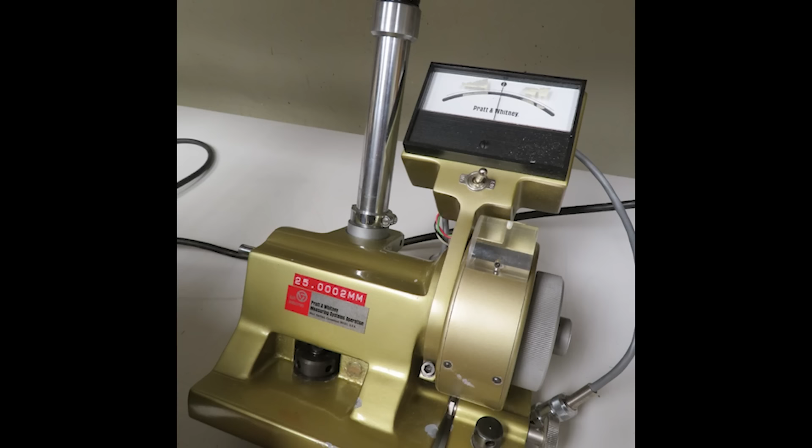British trade journals called American precision crude approximation masquerading as science. German engineers shook their heads at American mass production dreams. The French inventors of the metric system dismissed American measurements entirely. Then two men walked into the Pratt & Whitney workshop with an impossible promise.

William Rogers, a Harvard astronomy professor, and George Bond, a Stevens Institute graduate, claimed they could build a measuring machine accurate to 20 micro-inches. That's precise enough to detect the expansion of steel from human body heat. European experts laughed. Physics itself seemed to prove them wrong.

Temperature changes, vibrations, and humidity made consistent micromeasurements impossible, but deep in a climate-controlled Hartford workshop, something extraordinary was taking shape. The machine that would make European precision engineers question everything they thought they knew about measurement.

The morning fog clung to Hartford's factory district as Francis Pratt stepped through the gates of his precision tool workshop, the October chill of 1879 carrying with it the familiar sounds of American ambition grinding against European ridicule. Steam hissed from the heating pipes that ran along the brick walls, while the rhythmic hammering of drop forges echoed from neighboring buildings where manufacturers struggled with the same crushing reality that kept Pratt awake most nights. American mass production was drowning in its own inconsistency.

Pratt paused at his office window, watching workers carry steel components between buildings, each piece supposedly machined to identical specifications, yet requiring individual hand-fitting before assembly. The irony burned deeper each morning. His company, Pratt & Whitney, had built a reputation manufacturing precision tools and machinery, yet they couldn't solve the fundamental problem strangling American manufacturing. There was no standard inch.

Every factory, every craftsman, every measuring device operated with different definitions of basic measurements. A 12-inch gun barrel machined in Hartford measured differently from a 12-inch receiver produced in Springfield. The tolerances varied by thousands of micro-inches, making true interchangeable parts impossible. The consequences rippled through every corner of American industry.

Firearms manufacturers couldn't guarantee that components from different suppliers would fit together. Sewing machine companies faced similar nightmares when sourcing parts from multiple workshops. The emerging bicycle industry struggled to achieve the consistency that would make mass production economically viable. Each finished product required skilled craftsmen to hand-fit components, defeating the entire purpose of machine manufacturing.

European competitors observed American struggles with barely concealed satisfaction. British trade journals published scathing assessments of American precision, describing it as crude approximation masquerading as science. German precision engineers, who had spent generations perfecting mechanical measurement techniques, shook their heads at American attempts to rush processes that required patient refinement. The French, inventors of the metric system, dismissed American measurement standards as fundamentally chaotic.

The technical challenges seemed insurmountable. Existing measuring devices drifted with temperature changes, shifted with building vibrations, and fluctuated with humidity variations. Even the basic definition of an inch varied from city to city, as local standards had evolved independently without central coordination. Master craftsmen in Birmingham and Liège had developed measurement techniques over centuries of apprenticeship, achieving tolerances through hand-eye coordination and tactile sensitivity that machines couldn't replicate.

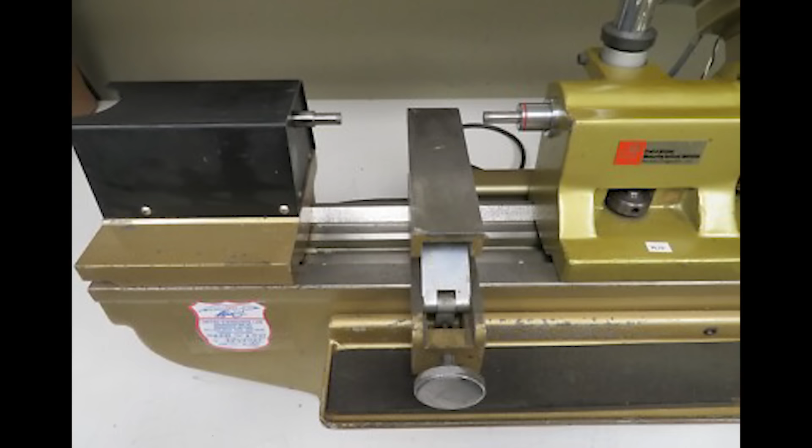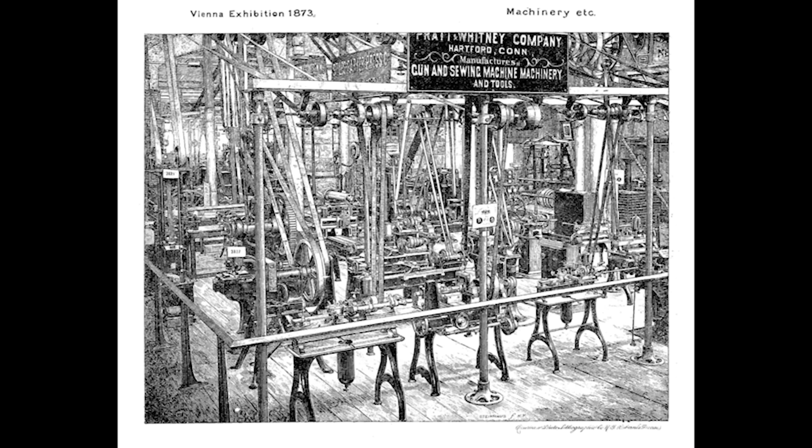European armorers in particular took pleasure in American measurement failures. They had perfected individual hand-fitting techniques that produced firearms of exceptional quality, with each component carefully adjusted to work with its specific partners. Why rush toward machine production when traditional methods guaranteed superior results? Their workshops operated like medieval guilds, with knowledge passed down through generations of craftsmen who understood precision as an art form rather than an industrial process.

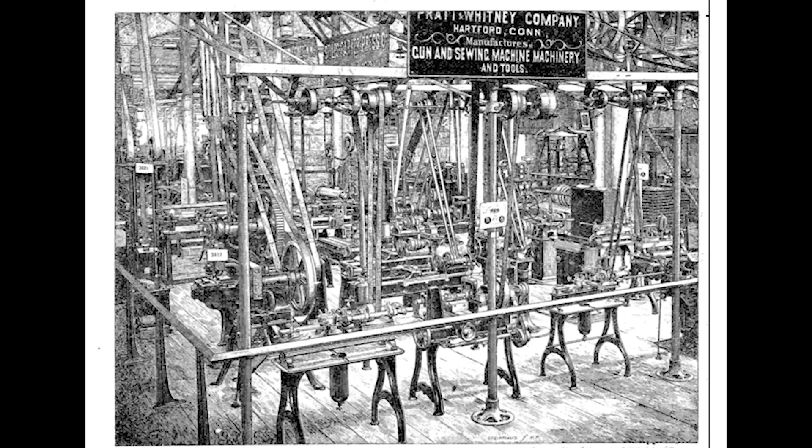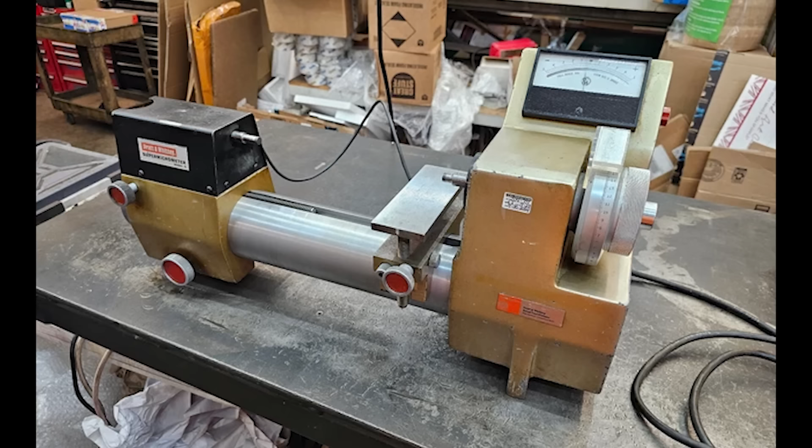The numbers told a devastating story. European master gaugers could work to tolerances of perhaps 100 micro-inches on their finest days, using techniques refined through decades of experience. American measurements, by contrast, varied by thousands of micro-inches even within individual factories. The gap wasn't merely technical, but philosophical. Europeans viewed precision as the culmination of human skill and patience, while Americans sought systematic methods that could be taught and replicated.

Pratt understood the stakes extending far beyond his own company's success. American industrial independence hung in the balance. The nation that had fought for political freedom remained economically dependent on European technical superiority. If American manufacturers couldn't achieve consistent precision, they would forever occupy secondary positions in global markets, assembling products designed and perfected elsewhere.

The financial pressures intensified daily. Government contracts demanded interchangeable parts, but contractors couldn't deliver without reliable measurement standards. Military officials, having witnessed multiple failures of American precision manufacturing, grew increasingly skeptical of domestic suppliers. The United States Army Ordnance Department maintained relationships with European armories precisely because American companies couldn't guarantee the consistency that military applications required.

Pratt's partner, Amos Whitney, shared the frustration that drove their search for solutions. Both men had left secure positions at Colt Manufacturing to establish their own company, betting everything on American systematic manufacturing. They believed that systematic engineering could surpass traditional European craftsmanship, but belief alone couldn't overcome the measurement crisis paralyzing their

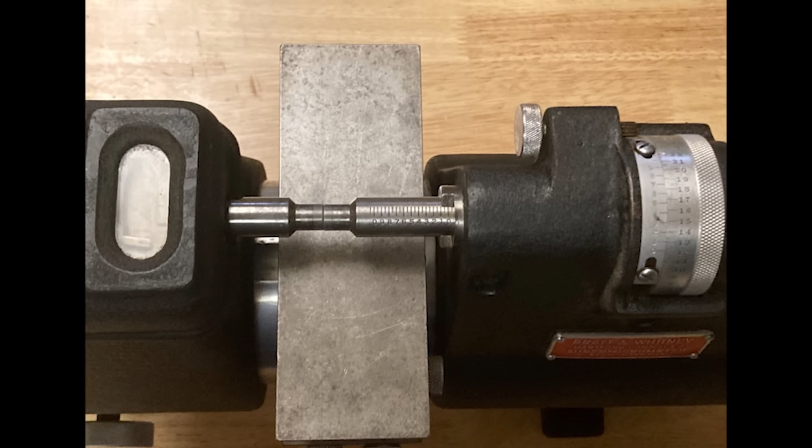industry. The breakthrough would require approaching measurement with entirely different assumptions. Instead of trying to perfect human technique, they needed mechanical amplification systems that could detect variations invisible to human senses. Instead of fighting environmental factors like temperature and vibration, they needed compensation mechanisms that accounted for these variables systematically.

The solution demanded collaboration between theoretical knowledge and practical engineering. Academic understanding of precision measurement needed to merge with workshop experience of manufacturing realities. The challenge wasn't simply building better measuring tools, but creating entirely new approaches to mechanical precision that could surpass centuries

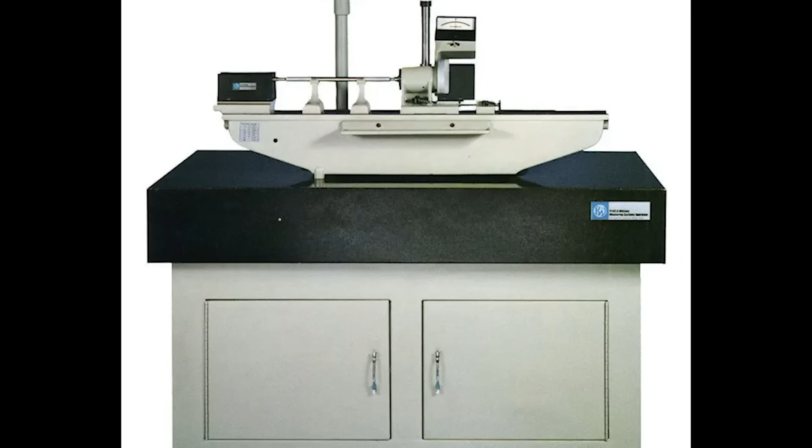of European craftsman tradition. As 1879 drew toward winter, American manufacturing stood at a crossroads. European critics seemed increasingly vindicated in their dismissal of American precision capabilities. The technical obstacles appeared too fundamental to overcome through American methods of rushing toward systematic solutions. Yet in workshops across Hartford and beyond, engineers refused to accept European superiority as permanent. The stage was set for either spectacular failure or revolutionary breakthrough that would redefine precision measurement forever.

William Rogers arrived at the Pratt & Whitney workshop on a crisp November morning in 1879, carrying leather satchels filled with astronomical instruments and notebooks, dense with calculations that had guided Harvard's telescope measurements for the past decade. The Harvard astronomy professor moved through the machine shop with the careful precision of a man accustomed to detecting celestial movements measured in micro-arc seconds, his trained eye immediately recognizing the mechanical chaos that plagued American manufacturing.

Steam hammers shook the building's wooden floors, while workers struggled with measuring devices that drifted with each temperature fluctuation. Yet Rogers saw possibilities where others saw insurmountable obstacles. George Bond emerged from the workshop's rear section, wiping machine oil from precision calipers that represented the current limit of American measurement capability. The Stevens Institute graduate had spent months studying the fundamental physics of mechanical measurement, documenting how existing tools failed under the environmental pressures of industrial production.

Bond approached Rogers with the directness of an engineer who had learned to communicate through demonstration rather than theory, immediately leading the professor to a workbench where half-assembled measuring devices revealed the scope of their challenge. The two men represented complementary approaches to precision measurement that had never been systematically combined in American manufacturing. Rogers brought theoretical understanding of measurement amplification derived from astronomical observation, where detecting stellar parallax required mechanical systems that could translate invisible movements into observable results.

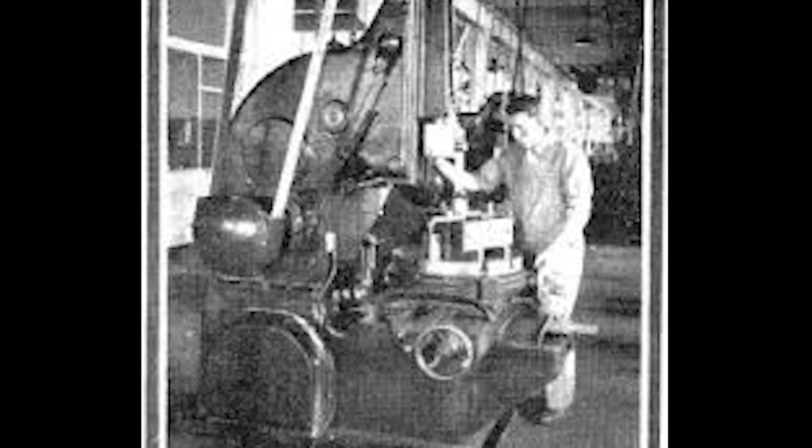Bond contributed practical engineering knowledge of manufacturing environments, understanding how temperature variations, building vibrations, and humidity changes affected mechanical stability in real workshop conditions. Their initial conversations revealed the magnitude of innovation required to achieve 20 micro-inch accuracy. Rogers explained how astronomical measurements use differential techniques to cancel out environmental variations, employing mechanical compensation systems that automatically adjusted for temperature changes and atmospheric pressure fluctuations.

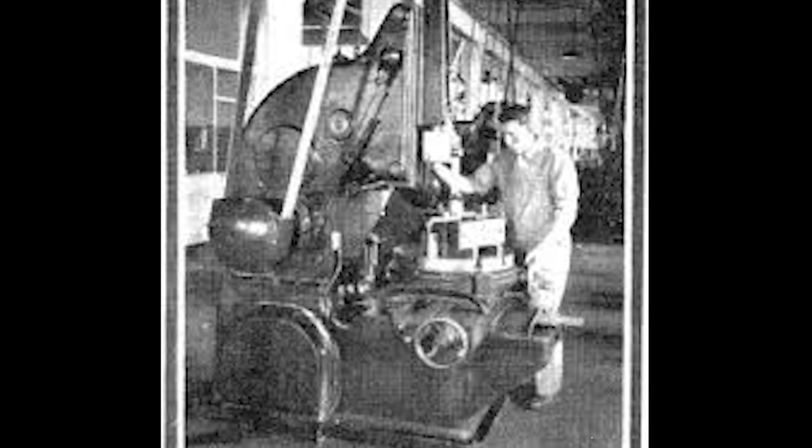Bond recognized immediately that similar principles could address the fundamental instability plaguing manufacturing measurement if they could design mechanical amplification systems robust enough to function in industrial environments. The breakthrough concept emerged during their third week of collaboration. Instead of fighting temperature changes that caused metal expansion and contraction, they would design materials combinations that naturally compensated for thermal variations. Rogers had observed similar principles in telescope mounting systems, where brass and steel components were deliberately chosen for their different expansion rates, creating mechanical stability across varying temperatures.

Bond realized that applying these astronomical techniques to manufacturing measurement could achieve consistency impossible with traditional single-material tools. Their design approach borrowed directly from stellar measurement methodology. Astronomical observations required detecting movements smaller than mechanical tolerances could normally measure, using leverage systems that transform tiny variations into visible displacements. Rogers proposed mechanical amplification ratios of 1,000 to 1, where a 20 microinch variation would produce a 20 thousandths inch movement detectable by conventional observation methods.

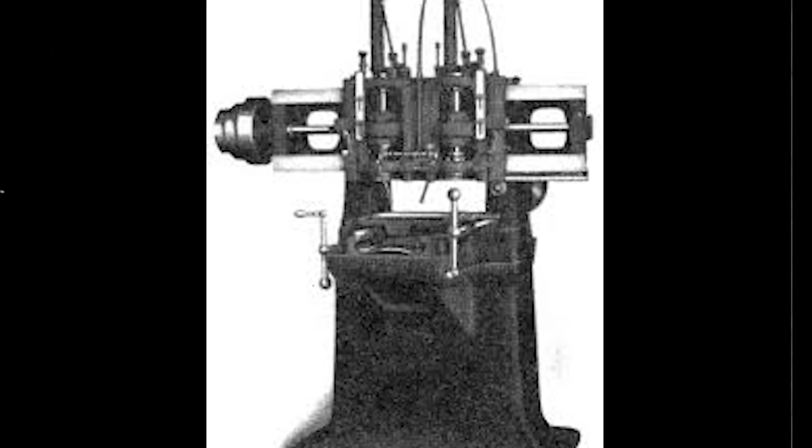Bond recognized that such amplification required precision ground surfaces and mechanical linkages engineered to tolerances far exceeding current American manufacturing capabilities. The differential screw mechanism became their central innovation. Rogers had used similar devices to adjust telescope positions with extraordinary precision, employing threaded components with slightly different pitches to create fine adjustment capability. When two screws with nearly identical thread pitches were mechanically linked, their differential motion could be controlled to micro-inch precision. Bond adapted this astronomical technique for comparative measurement, designing systems where unknown dimensions could be compared against known standards with unprecedented accuracy.

Material selection demanded careful engineering that combined Rogers's theoretical knowledge with Bond's practical experience. They chose brass components for their stability and workability, combined with hardened steel surfaces for wear resistance and dimensional accuracy. The thermal expansion characteristics of these materials were calculated to provide natural compensation across the temperature ranges typical of manufacturing environments.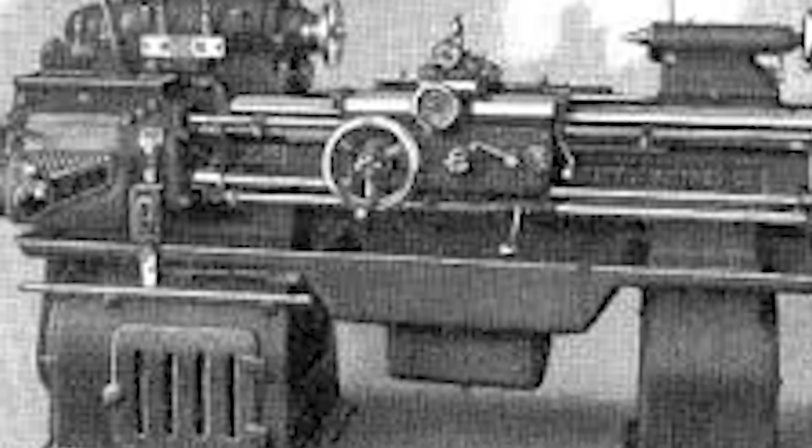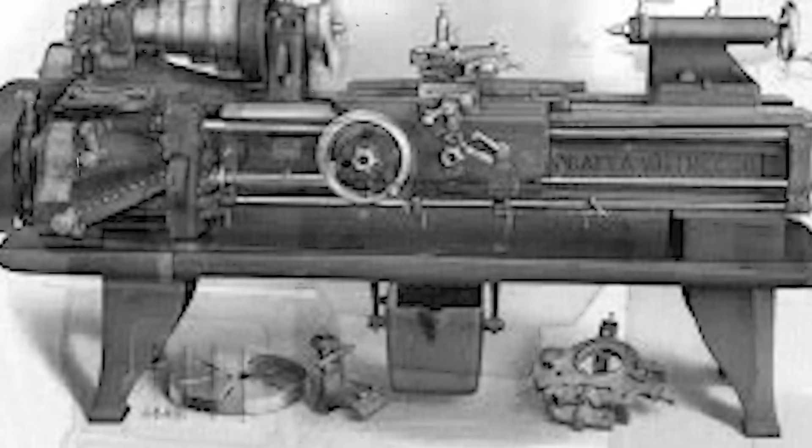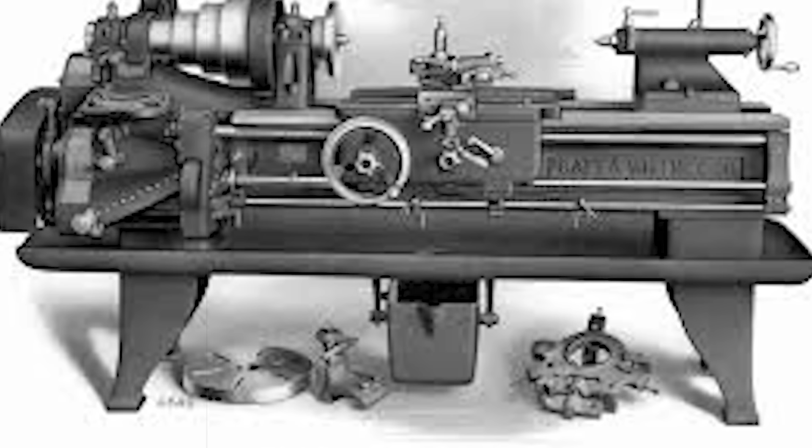Rogers applied heat transfer equations derived from observatory environmental control, while Bond contributed workshop knowledge of realistic temperature variations in industrial settings. The mechanical amplification system required precision grinding techniques that pushed American manufacturing capability beyond existing limits. Each contact surface needed to be finished to tolerances measured in fractions of micro-inches using grinding and lapping processes that Bond developed specifically for their project.

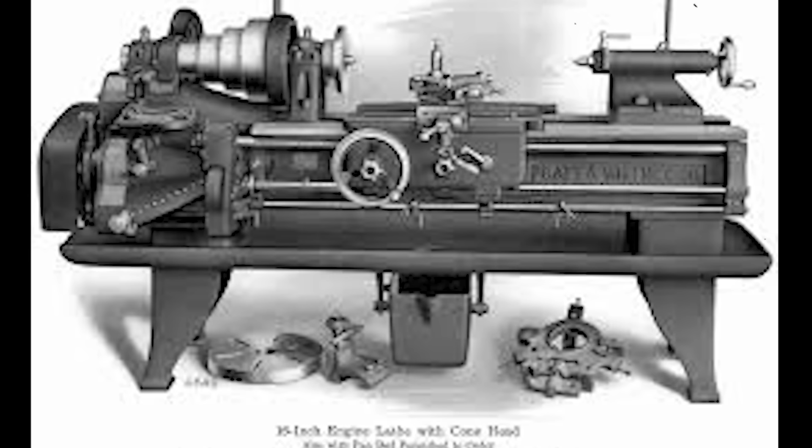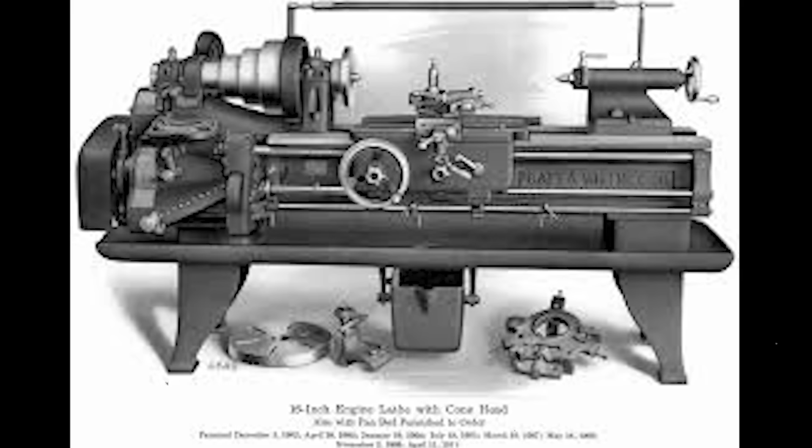Rogers contributed theoretical understanding of how surface irregularities affected measurement accuracy, derived from his experience with telescope mirror surfaces where microscopic imperfections could distort stellar observations. Environmental isolation became another critical design element. Rogers understood from astronomical work how external vibrations could corrupt precise measurements, requiring mechanical systems isolated from building movement and machinery vibration. Bond designed mounting systems that provided mechanical stability while allowing the necessary adjustments for comparative measurement operations. Their isolation techniques borrowed from observatory practice, but adapted to manufacturing environments where complete vibration elimination was impossible.

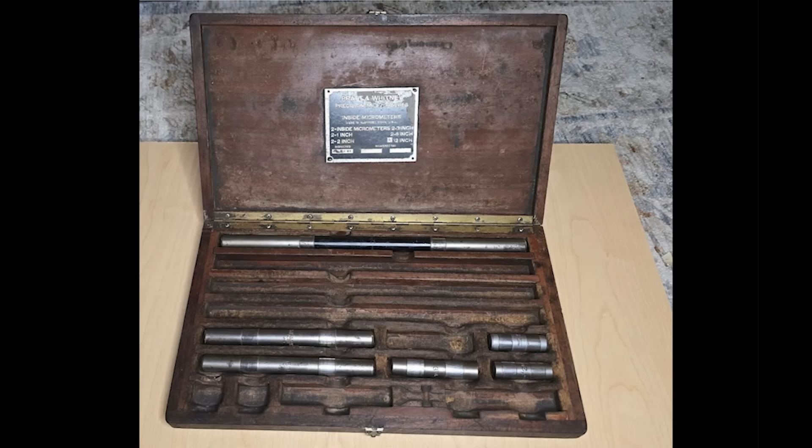The temperature compensation mechanism represented their most sophisticated innovation. Rogers calculated thermal expansion coefficients for their brass-steel combinations, designing mechanical linkages that automatically adjusted for temperature variations without requiring manual correction. Bond engineered the mechanical implementation of these calculations, creating systems where thermal expansion in one component was automatically offset by corresponding changes in related components. By winter's end, their theoretical foundation was complete. The Rogers-Bond comparator design combined astronomical measurement principles with manufacturing engineering in ways that had never been attempted in American industry.

Rogers had provided the scientific framework for achieving 20 microinch accuracy through mechanical amplification and thermal compensation. Bond had solved the practical engineering challenges of implementing these techniques in workshop environments where precision measurement needed to function reliably under real production conditions. Their collaboration had produced detailed engineering drawings and mathematical specifications for a measuring machine that could theoretically achieve accuracy surpassing European master craftsmen. Yet theory remained untested by the harsh realities of manufacturing implementation. The next phase would determine whether American systematic engineering could actually deliver the precision that centuries of European craftsmanship had established as the global standard for mechanical measurement.

The spring of 1881 brought unprecedented international attention to Hartford's industrial district, as news of the Rogers-Bond comparator spread through engineering circles from London to Berlin. Thomas Henderson, leading a British delegation of precision engineers, stepped off the train at Hartford's Union Station with expectations shaped by decades of European superiority in mechanical measurement. The British team had traveled across the Atlantic expecting to witness typical American overconfidence masquerading as technical innovation, armed with their own precision instruments to expose the inevitable shortcomings of rushed American manufacturing methods.

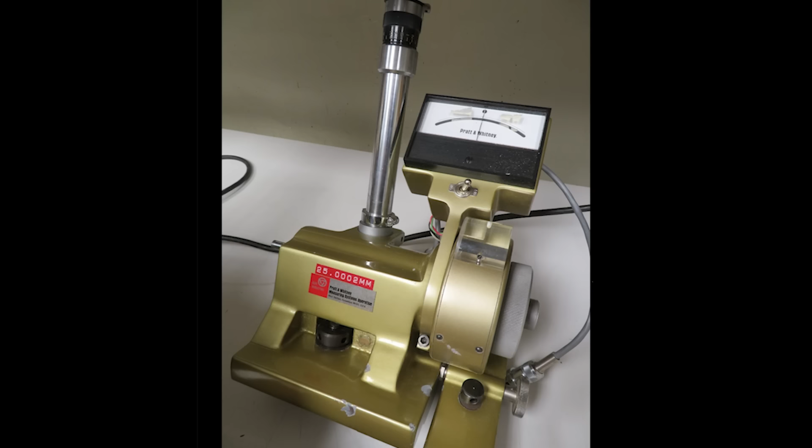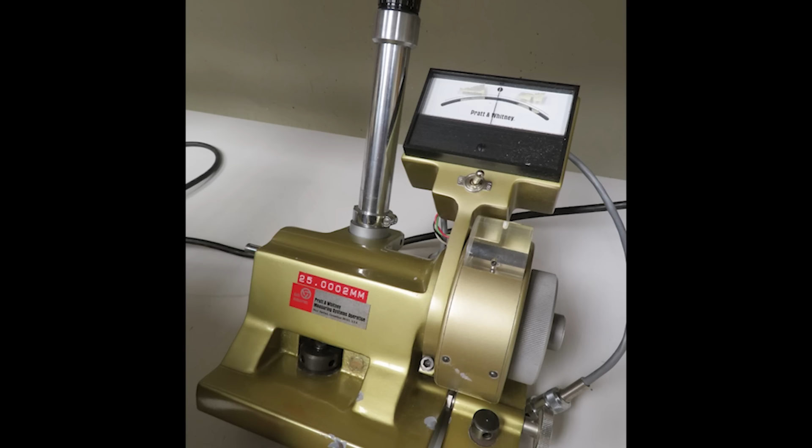Bond met the delegation at the Pratt & Whitney gates, his confidence evident in the unhurried manner with which he guided them through the workshop toward the climate-controlled measurement room that had become the project's nerve center. The British engineers noticed immediately that the Americans had invested considerable resources in environmental controls far exceeding typical manufacturing facilities. Temperature-regulated chambers, vibration isolation systems, and humidity controls suggested a level of sophistication that challenged their preconceptions about American precision manufacturing. The measurement room itself defied European expectations of American workshop conditions.

Massive stone foundations isolated the Rogers-Bond comparator from building vibrations, while carefully regulated heating systems maintained temperatures within fractions of degrees. Gas lamps provided steady illumination without the heat fluctuations of conventional workshop lighting. The mechanical precision evident in every component surprised visitors accustomed to American manufacturing environments where speed took precedence over refinement. Henderson examined the comparator's differential screw mechanisms with the skeptical eye of an engineer who had witnessed countless measurement devices fail under rigorous testing. The device's brass and steel construction impressed him with its sophisticated understanding of thermal compensation principles, while the mechanical amplification systems demonstrated engineering knowledge that surpassed many European implementations. Yet Henderson maintained professional reservations about American claims of 20 micro-inch accuracy, having learned through experience that theoretical precision rarely survived practical application.

The demonstration began with Bond adjusting the comparator to measure standard gauge blocks whose dimensions had been verified by European master craftsmen. The mechanical amplification system transformed micro-inch variations into clearly visible movements on precision dials, while the thermal compensation mechanisms automatically adjusted for temperature fluctuations that would have corrupted conventional measurements. British observers watched in growing amazement as the American device consistently detected variations smaller than their own instruments could reliably measure. Rogers joined the demonstration to explain the astronomical principles underlying their measurement techniques.

He described how stellar parallax measurements required detecting angular variations measured in micro-arc seconds, using mechanical systems that amplified invisible movements into observable displacements. The British engineers recognized immediately that applying astronomical methodology to manufacturing measurement represented innovation far beyond typical American approaches to precision engineering. Rogers' explanations revealed theoretical sophistication that challenged European assumptions about American technical capabilities. The crucial test involved measuring components that European craftsmen had hand-fitted to tolerances, representing the pinnacle of Birmingham manufacturing precision.

British delegation members had brought gauge blocks and precision components, whose dimensions they considered definitive standards for mechanical accuracy. The Rogers-Bond comparator not only matched their measurements, but detected variations that European instruments couldn't consistently observe. Henderson found himself witnessing precision that exceeded the capabilities of equipment used in Britain's finest workshops.

Bond demonstrated the comparator's stability by conducting repeated measurements over several hours, while building temperature fluctuated with changing weather conditions. The thermal compensation mechanisms maintained measurement accuracy despite environmental variations that would have rendered European devices unreliable.

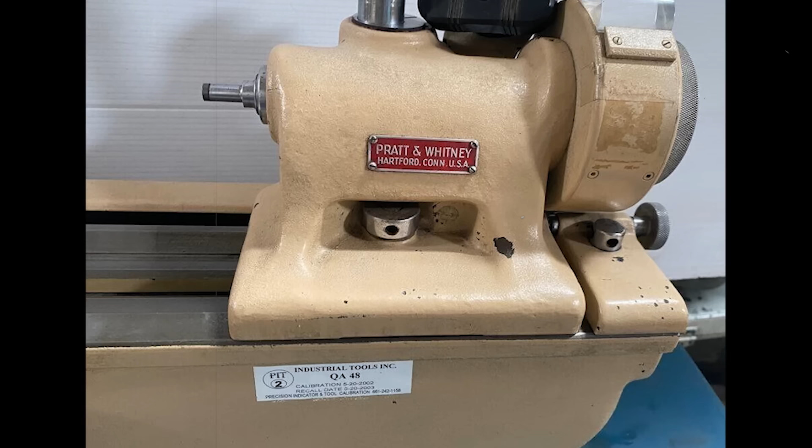British engineers observed mechanical consistency they had never imagined possible, achieved through systematic engineering rather than craftsman skill developed over generations of apprenticeship. The delegation's skepticism transformed into professional admiration as they recognized genuine technical achievement. Henderson privately acknowledged that American systematic methods had produced measurement capabilities surpassing traditional European approaches.

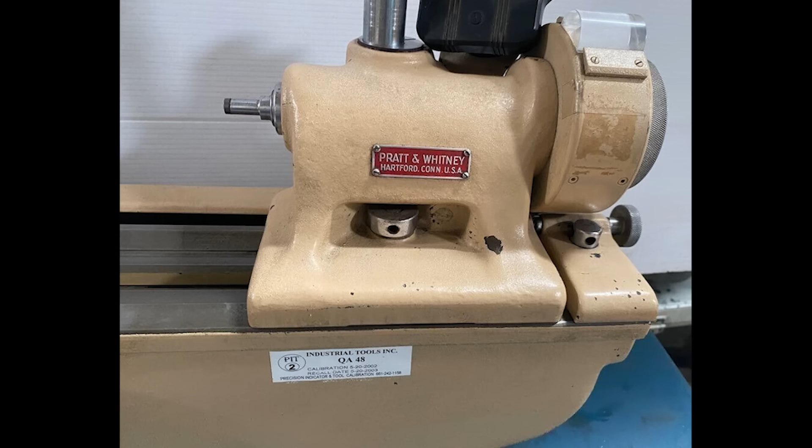The mechanical amplification ratios, thermal compensation systems, and environmental isolation techniques represented innovations that British manufacturing could adopt to improve their own precision capabilities. Yet accepting American technical superiority challenged fundamental assumptions about European manufacturing supremacy. Word of the successful demonstration spread rapidly through international engineering networks.

Technical journals in London began publishing detailed accounts of American measurement innovations, while German precision manufacturers sent their own representatives to evaluate Hartford's developments. French metrologists, despite their dismissal of American measurement standards, initiated correspondence with Rogers regarding theoretical aspects of mechanical amplification systems applied to comparative measurement.

The Rogers-Bond comparator's reputation reached government procurement offices where military contracts demanded precision that traditional American manufacturing had never achieved. United States Army Ordnance Department officials, having witnessed multiple failures of domestic precision manufacturing, scheduled their own evaluation of the Hartford innovation. Colonel James Whitfield, responsible for firearm component standardization, approached the demonstration with professional skepticism, tempered by hope that American manufacturing might finally achieve European quality precision.

European manufacturing facilities began expressing interest in licensing American measurement technology, reversing traditional patterns of technological transfer across the Atlantic. British armories that had dismissed American precision capabilities initiated negotiations for Rogers-Bond measurement systems. German toolmakers investigated importing American comparators to improve their own manufacturing consistency. The technical achievement represented a fundamental shift in global perceptions of American engineering capabilities.

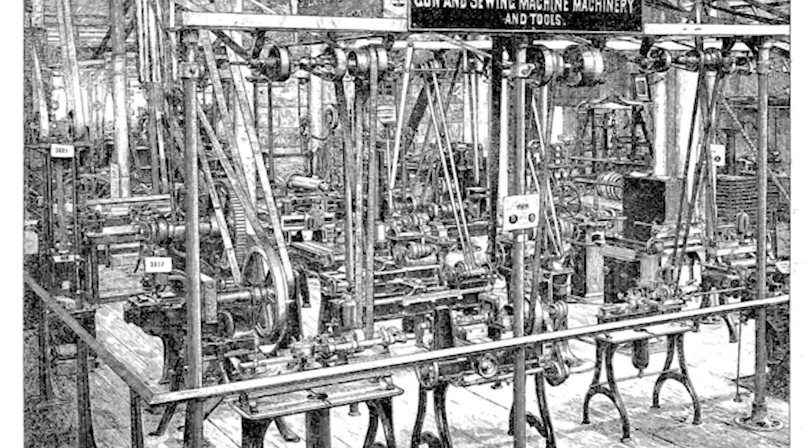The measurement room's environmental controls had been fine-tuned to maintain perfect stability, while precision gauge blocks verified by multiple international standards awaited testing that would prove American systematic engineering superior to European craftsman methods. The morning began with promise as Bond guided the military delegation through preliminary demonstrations that showcased the comparator's mechanical amplification systems and thermal compensation mechanisms.

Whitfield examined the differential screw mechanisms with the professional skepticism of an officer who had witnessed countless manufacturing promises collapse under operational pressure. Yet the initial measurements matched theoretical specifications with consistency that impressed even the most cautious observers. The brass and steel components functioned flawlessly, while precision dials indicated variations measured in fractions of microinches.

Then the Hartford workshop's steam heating system activated for the first time since spring maintenance, sending thermal fluctuations through the building that had never been tested against the comparator's environmental isolation systems. Hot water pipes running beneath the measurement room's floor created temperature gradients that overwhelmed the thermal compensation mechanisms designed for gradual seasonal changes rather than sudden heating system cycles.

Bond watched in growing alarm as measurement readings began fluctuating beyond acceptable tolerances, despite environmental controls that had maintained stability throughout months of successful demonstrations. The mechanical amplification systems that transformed microinch variations into observable movements now magnified thermal instabilities into erratic dial fluctuations that destroyed measurement credibility.

Bond refused to abandon the project despite overwhelming evidence that environmental instability had destroyed the Rogers-Bond comparator's credibility with potential customers and financial backers. He remained in the workshop through winter nights, studying thermal patterns and mechanical responses that had caused the demonstration disaster. His engineering intuition suggested that systematic solutions existed for problems that had defeated their initial approaches, if he could identify the fundamental sources of thermal instability that overwhelmed their compensation mechanisms.

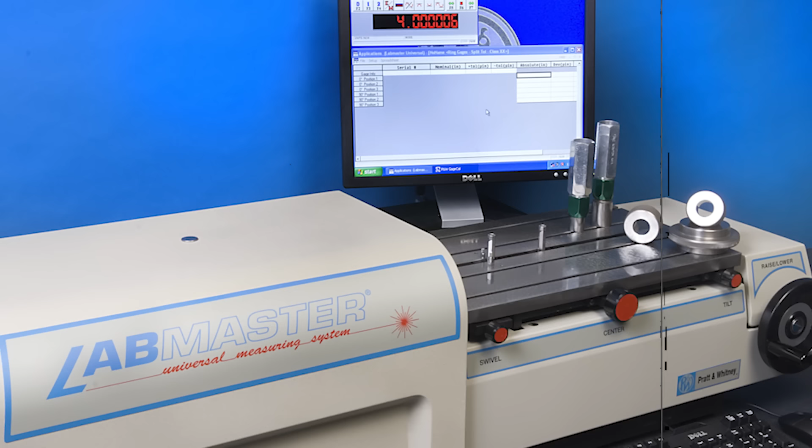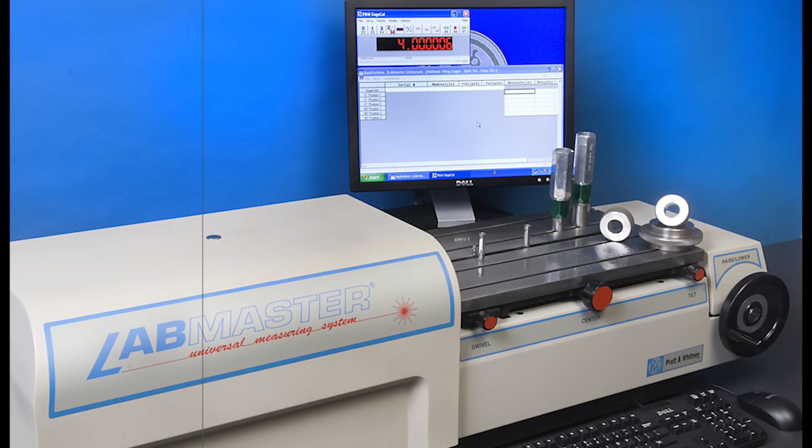The revelation came to Bond during a bitter February night in 1882 as he remained alone in the workshop, studying thermal patterns with instruments borrowed from Rogers' astronomical equipment. Smoke from his oil lamp created barely perceptible air currents that danced across the measurement room, revealing convection patterns invisible during daytime operations when heating systems and human activity masked subtle atmospheric movements. Bond realized suddenly that the building's steam heating created not just temperature variations, but air circulation patterns that generated microscopic vibrations affecting measurement stability in ways their isolation systems had never addressed.

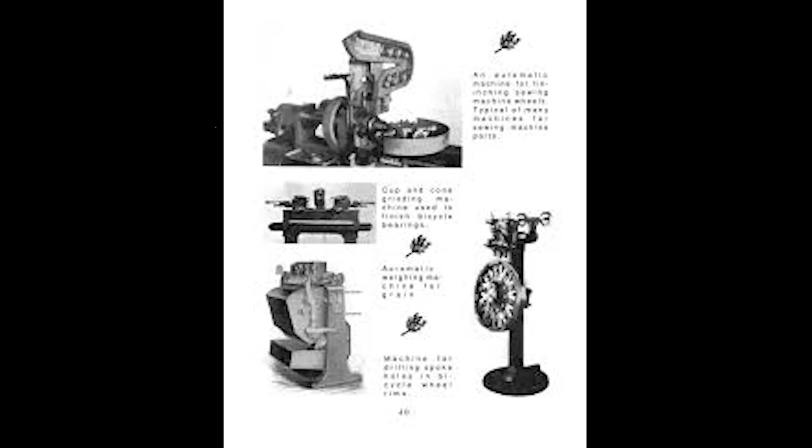The breakthrough understanding emerged from careful observation of how thermal convection interacted with mechanical precision. Steam radiators distributed throughout the workshop created rising columns of heated air that generated atmospheric turbulence, while temperature differentials between heated and unheated surfaces produced air currents carrying microscopic particles and moisture variations. These environmental factors created measurement instabilities that mechanical isolation couldn't address because the problems originated within the measurement environment itself, rather than from external building vibrations. Bond's solution required complete reconceptualization of environmental control for precision measurement.

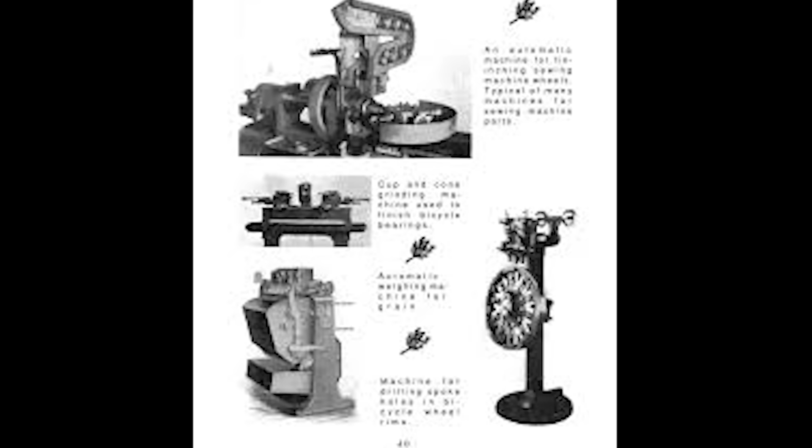Instead of merely isolating the comparator from external disturbances, he needed to create atmospheric stability that eliminated internal sources of measurement variation. This meant designing climate control systems that maintained not just temperature consistency, but atmospheric stillness, humidity stability, and elimination of air circulation patterns that could affect mechanical precision at the micro-inch level.

The engineering challenges demanded innovations that pushed American manufacturing capability beyond existing limits. Bond designed ventilation systems that provided fresh air without creating circulation patterns, using horizontal air movement instead of convection currents that would disturb measurement stability. Temperature control required radiant heating systems that eliminated hot air circulation while maintaining thermal consistency throughout the measurement chamber. Humidity control demanded materials and sealing techniques that prevented atmospheric moisture variations from affecting mechanical components.

Rogers returned from Harvard in March with renewed enthusiasm for the project, after Bond's letters described systematic solutions to environmental control problems that had destroyed their initial demonstration. The Harvard professor brought additional astronomical instruments designed for detecting atmospheric disturbances that affected stellar observations, recognizing that precision measurement required environmental control approaching observatory standards.

Their collaboration resumed with deeper understanding of how workshop conditions differed from laboratory environments where their original success had been achieved. The reconstructed measurement facility incorporated lessons learned from the demonstration disaster with engineering sophistication that exceeded their original design. Thermal isolation systems used multiple material layers with different expansion characteristics to create temperature stability, while mechanical isolation employed vibration dampening techniques borrowed from astronomical equipment mounting. Environmental controls maintained atmospheric conditions within tolerances measured in fractions of degrees and percentage points of humidity variation.

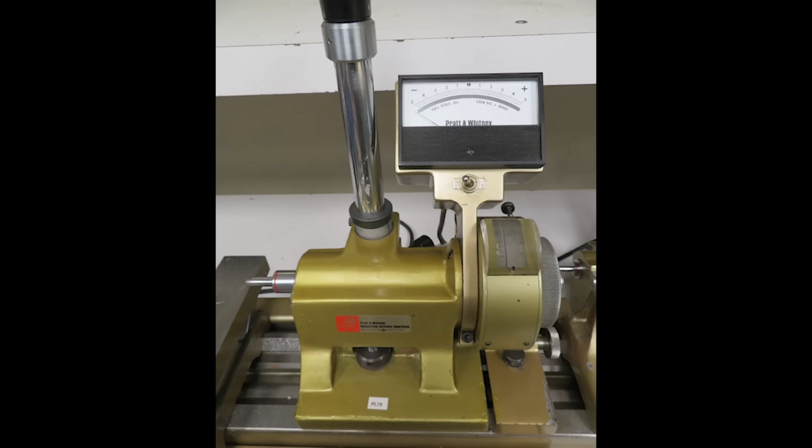The successful second demonstration established American precision measurement as internationally superior to European alternatives through systematic engineering rather than traditional craftsman skill. Government contracts followed immediately as military procurement officials recognized capabilities that American manufacturing had never previously achieved. International attention resumed with European manufacturers acknowledging that American systematic methods had produced innovations that traditional approaches couldn't match through individual skill alone. European engineering delegations returned to Hartford throughout 1882 with expectations transformed by reports of American technical achievement that challenged fundamental assumptions about precision manufacturing.

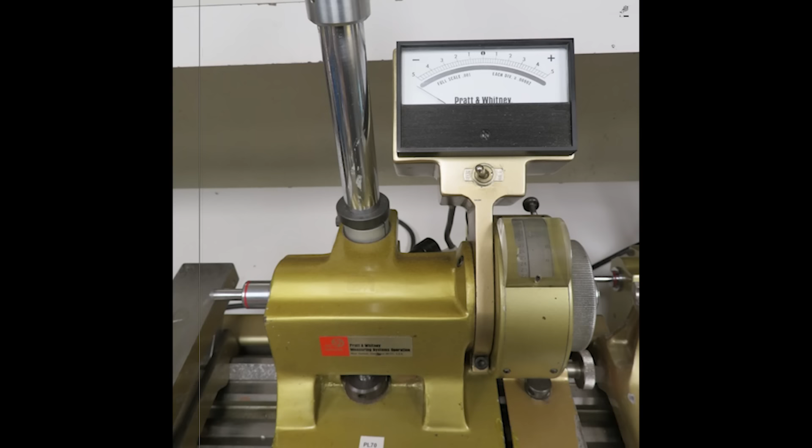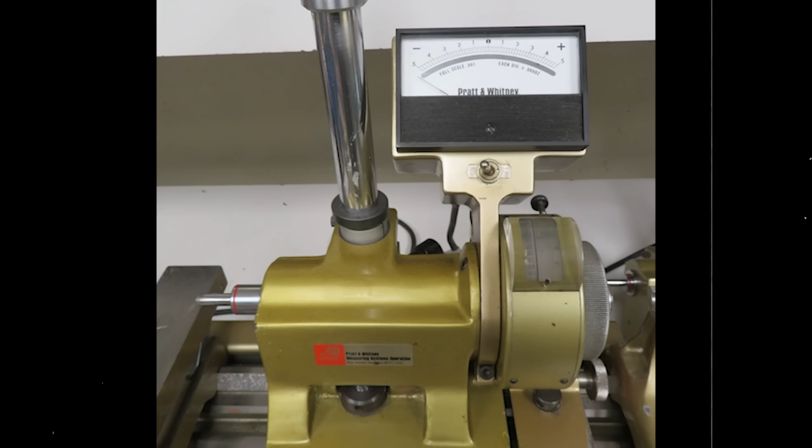British toolmakers found measurement capabilities exceeding their finest workshop standards, while German precision engineers acknowledged American innovations that surpassed European systematic approaches to mechanical accuracy. French metrologists initiated collaborative research projects based on Rogers-Bond principles that American engineering had proven superior to European alternatives. By 1885, the Rogers-Bond comparator had achieved accuracy to 100,000th of an inch, surpassing original specifications through continuous improvement of environmental control and mechanical precision techniques.

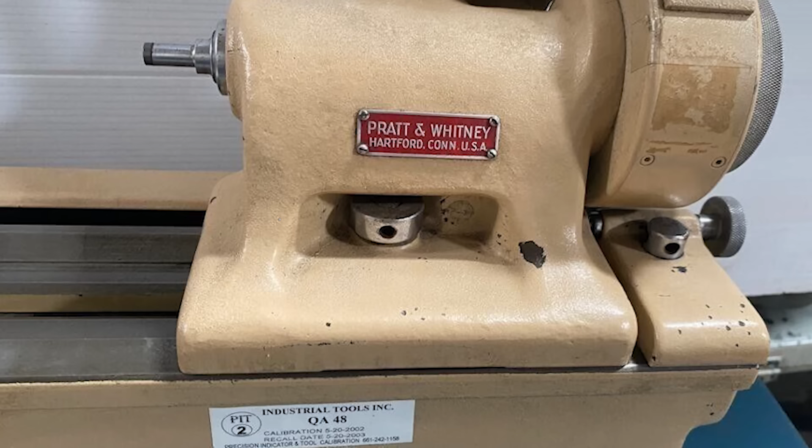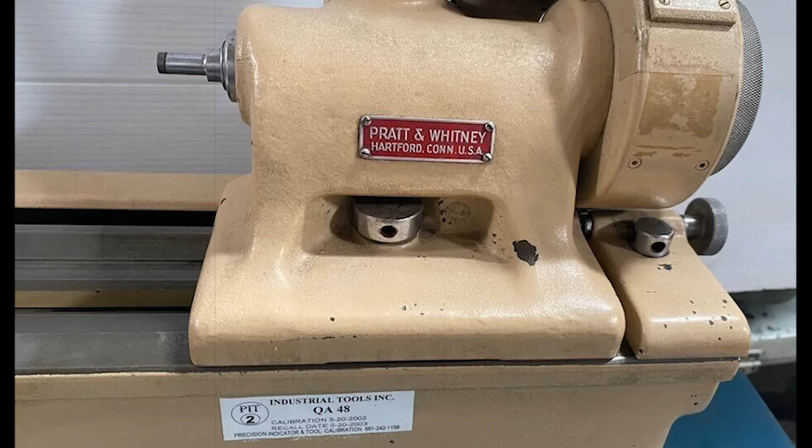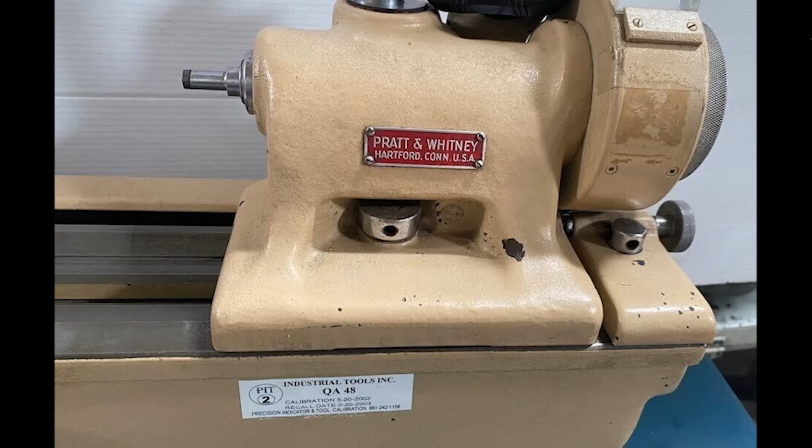American standard measuring machines were being exported to European factories whose craftsmen had previously dismissed American precision capabilities. British armories contracted with Pratt & Whitney because American firms could achieve interchangeable parts production using less machinery than European methods required. The global impact extended far beyond measurement technology, as American systematic manufacturing established superiority over European traditional methods across multiple industries. Firearms manufacturers achieved true interchangeable parts production, while sewing machine companies and bicycle manufacturers benefited from precision standards that made mass production economically viable.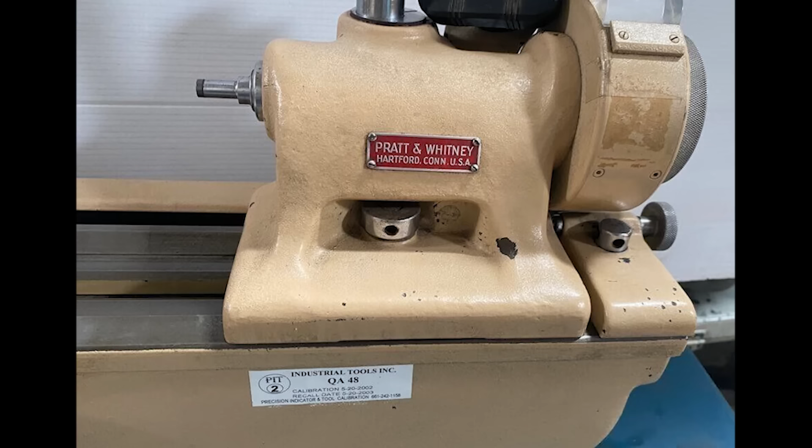The Rogers-Bond principle had proven that systematic engineering could surpass centuries of European craftsmanship tradition through innovations that addressed fundamental problems rather than accommodating limitations through human skill. European recognition of American precision superiority marked the end of technical dependence that had constrained American manufacturing since independence. The nation that had fought for political freedom achieved economic independence through systematic engineering innovations that established American technical leadership in global markets. The foundation was established for precision manufacturing advances that would enable everything from mass-produced automobiles to aircraft engines, proving that American systematic methods could achieve results impossible through traditional European approaches to mechanical precision.